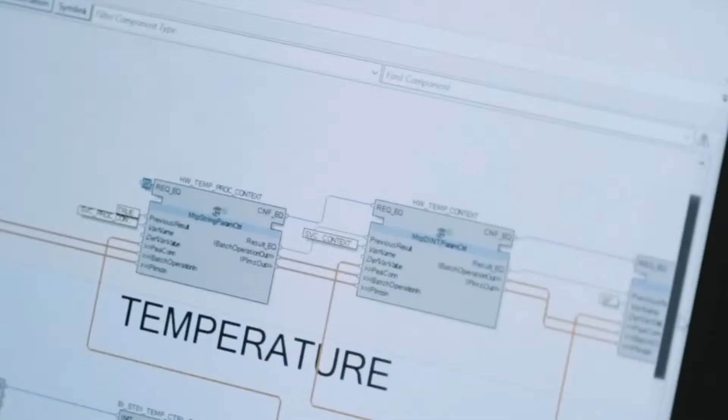universalautomation.org is about sharing a technology, a shared runtime execution engine. We call it a game changer in automation because we have first one technology which is based on IEC 61499, the standard which aims at decoupling hardware and software.

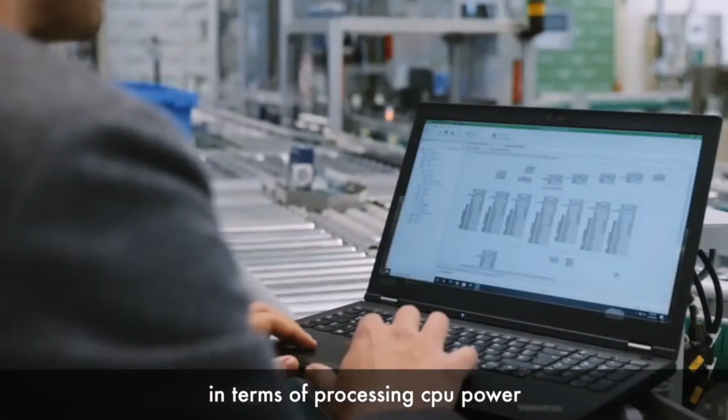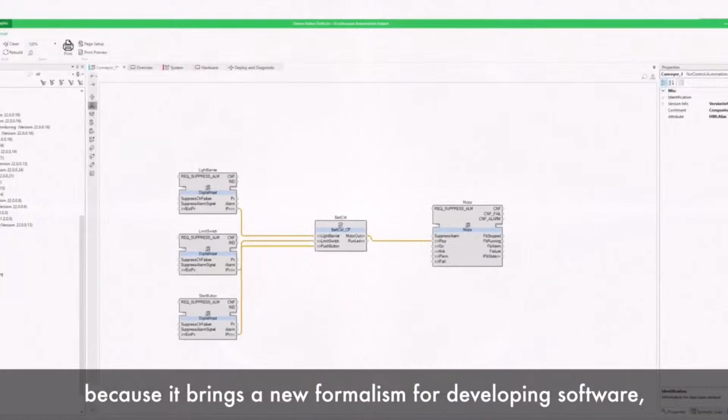Hardware itself is becoming very performant in terms of processing and CPU power, and the future is more about software. This approach is really a winning approach because it's very flexible. You develop the application once and can reuse it in each different configuration. That's exactly what Universal Automation and 61499 enable, because it brings a new formalism for developing software, which is object-oriented in nature, and allows deployment over distributed hardware for the final control system.

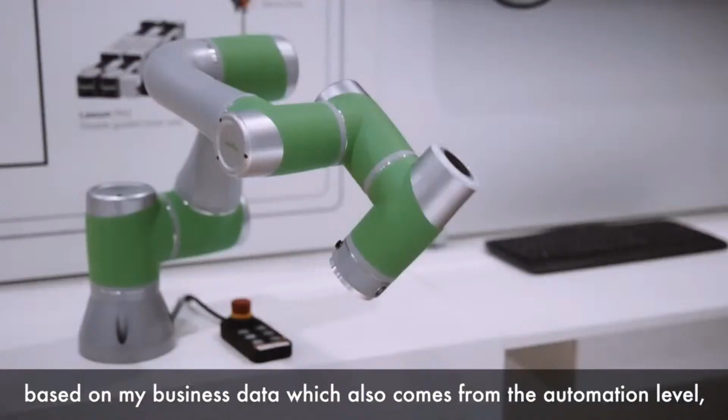So let's say it's a marriage made in heaven. If I want to make more conscious decisions based on my business data, which also comes from the automation level, I need universal automation to get this data efficiently and with the right engineering effort on the level where I can run the analytics.

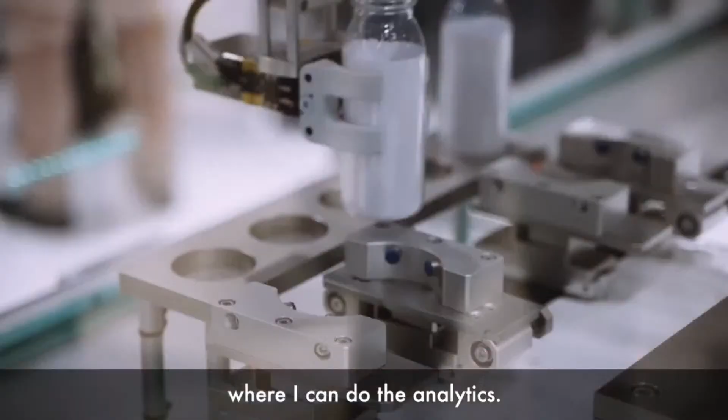Offers are available, not just from Schneider Electric with EcoStruxure Automation Expert, but also from Advantech, from Stahl, from ESA in Italy, and from other companies.

Advantech is growing really, really fast, and I believe if you want to keep growing in the future, you need to be able to innovate. When I see the universal automation approach, it is exactly the way of innovation we need to go with.

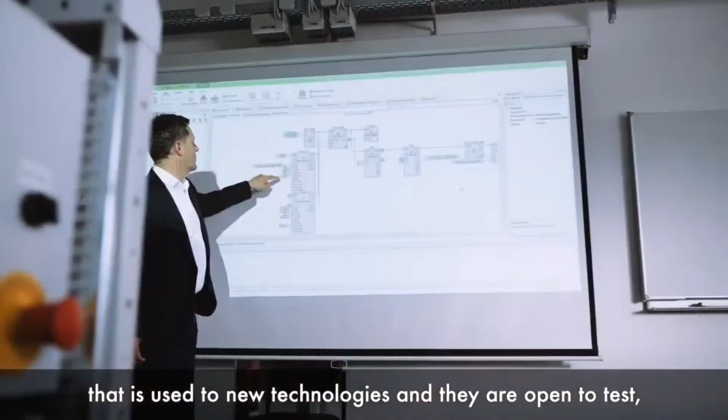Most of our customers from process automation are pretty conservative, so never change a running system. But now we see a new generation coming up, who are used to new technologies, and they are open to test and try these new functionalities. I think most of them understand the advantages of this pretty well.

I've been doing this now for 20 years, and I think over the years this is the most exciting change. From my experience, I see that in IT there has been a big revolution, and I expect the same in automation. I don't know when it will happen, probably takes a little bit of time, but probably a revolution will come.

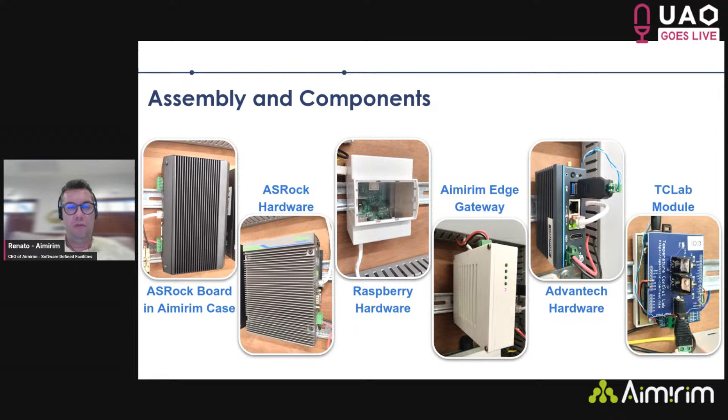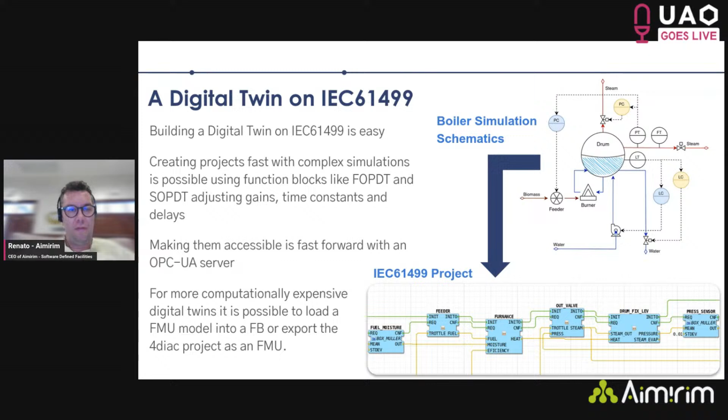So you have a basic digital twin that we built inside this test bed that emulates a virtual industry, a virtual facility, because we don't have a facility ourselves. We're a startup, so we have to build these kinds of digital twins to create our models and our software.

Thank you for this time. Now Pedro will show a real-time application of the plugin.

Hello everyone. Before we dive into the plugin usage, I'd like to show you a little bit about the environment we've built for this demonstration.

In our test bed, we assembled a system with 4 DCNs. Everyone is running UAO runtime.

The first DCN has this blue project, a Raspberry Pi running a virtual plant, that digital twin we just showed you about. Next to it, we have an ASRock board running UAO runtime as well. This DCN runs the yellow project, an advanced process control project, connected to the virtual plant, the digital twin of the boiler, with OPC UA.

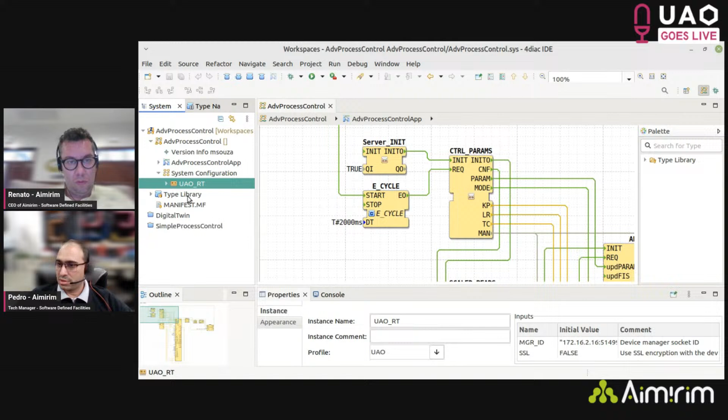I just click on UAO runtime here, go here, and I will kill the device, which will clean up everything running on there. It doesn't show any errors on the screen, so that cleanup was successful.

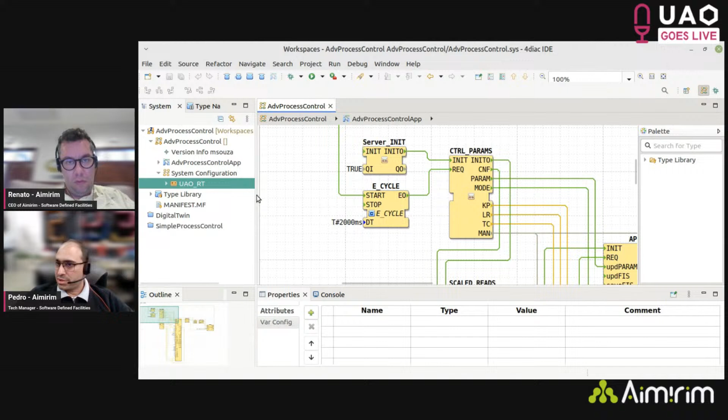Let me just close this project so I don't get confused. Now, to create a new project, you right-click on this tree here, go New, then enter a project name, I will call it set point change example.

It's provisioning it. There it is.

Now, first, we go to the system configuration and let's drag here the UAO runtime function block. Okay, this will connect things.

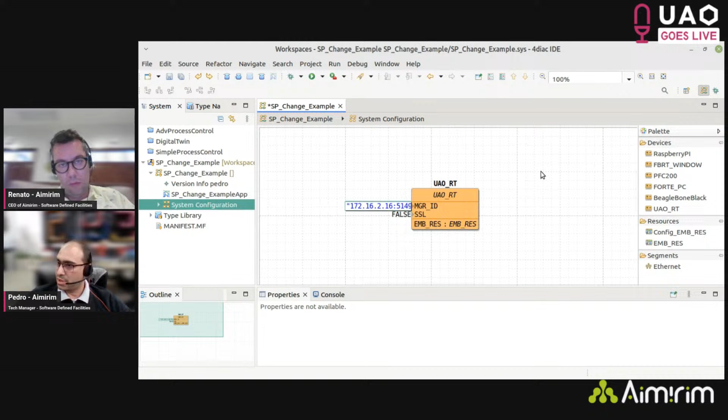So my DCN is running on this IP here, 216, and the UAO runtime is running on this port. You can see below on the properties of this function block, the system, that you have the profile. So you need to change the profile here for the UAO. This is changing the communication with the runtime.

Okay, so you're going this, let's save it. Now let's go to the system view here, clean project. Now let's build a project here. Let's go for a cycle first. I want to have a 1 second cycle.

Then I'm about to, let's read that set point first. So I'm about to call this function block here.

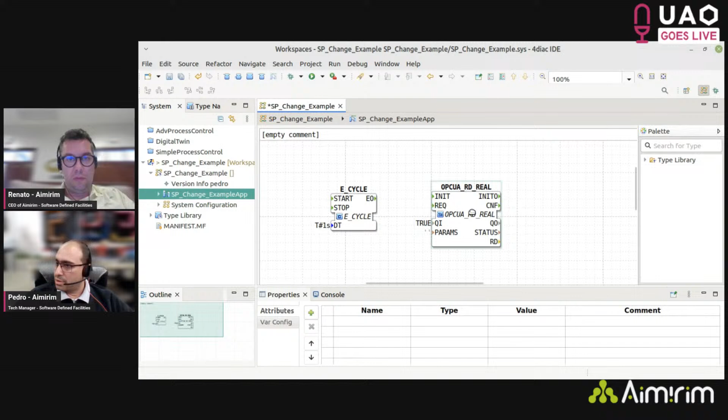Yep, let's read that value. I go to the parameters here. Let me edit this. So my connection string to read that is opc.tcp colon // the Advantech hardware IP address,

right? So it's 172.16.2.4, and the OPC UA server port that is running there is 4840. Okay, so let's go here.

That's a separator. Now, the variable I wish to read is on namespace one, and it is a string identification for it. It's called PID dot setpoint.

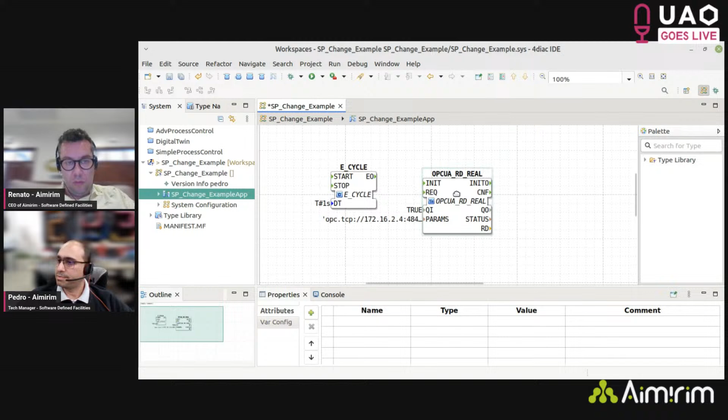Yep, that's it. Okay, now let's duplicate this function block here. And I want to, let me rename it first so I don't get confused, read.

Now I wish to write on the same variable. And I will change this function block here. Let's change type to the one that writes a real value.

Okay, let's start this one with 45, for example. Oh, it's a float, 45.0.

Okay, let's connect things now. I will initialize everything, and after the successful initialization, I want to trigger a cycle. Then this cycle, I want to trigger the read function block. I don't want to request a write just yet.

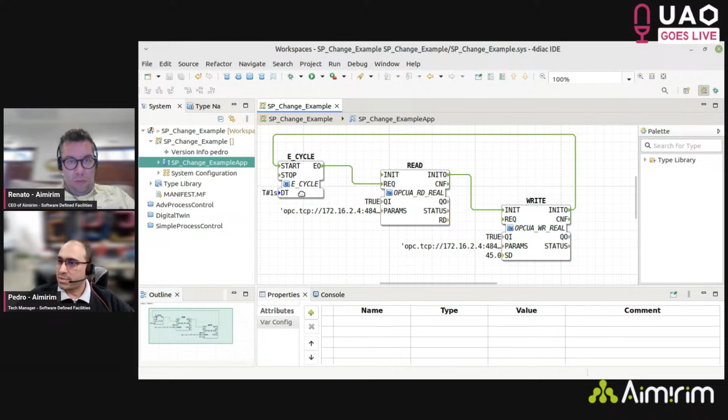Okay, so let's go. I'll select everyone, map them. Now they're mapped to the UAO runtime. And let's go ahead and deploy. So, run as deploy.

Okay, that was pretty fast deploy. Now let's watch this function block here. It would advise me to enable the monitoring. Yes, please do that.

Okay, there it is. Let me watch the function block below. It is already deployed on 4diac and it's already deployed on UAO runtime. Let me trigger this initialization here. You see good, and you see 35 as the current set point.

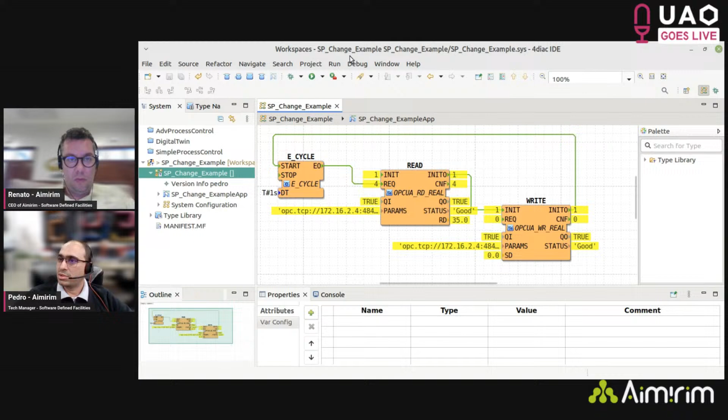Okay, to show a little better the view of this, let me just open the platform, so you guys can have a clean view about what I'm about to do. Okay, so we have a user prepared for this.

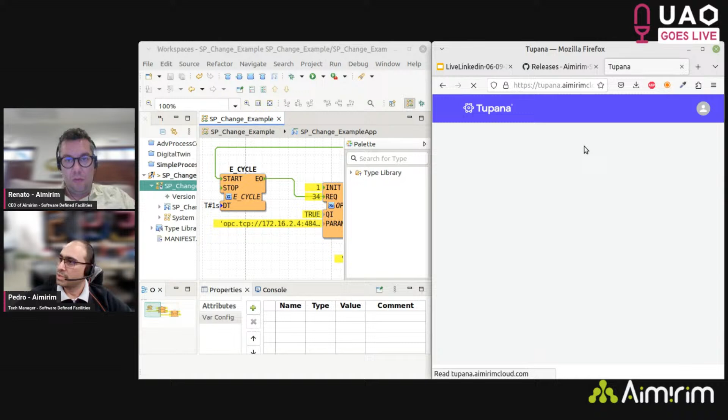Okay, now let's go here in my screen. Let's force some value here. Let's say 65.0. And let's request this right here.

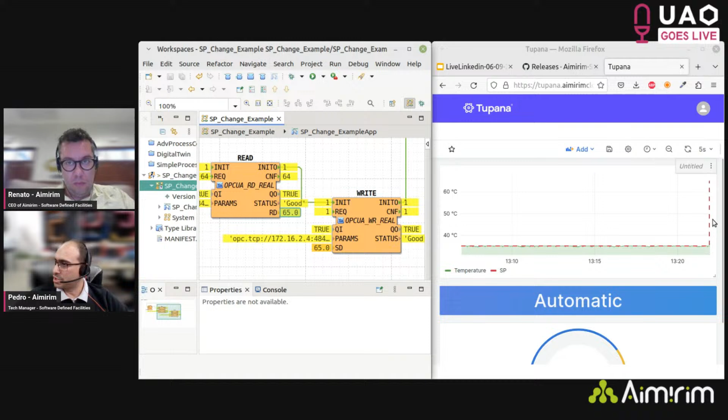Trigger it. Okay, you see here on the read block that it goes, and on the platform that is a cloud platform, you just saw the step on it. Here below, you just see the PID is working, so it jumps the control to 100% to heat everything up, and this temperature should start rising anytime soon.

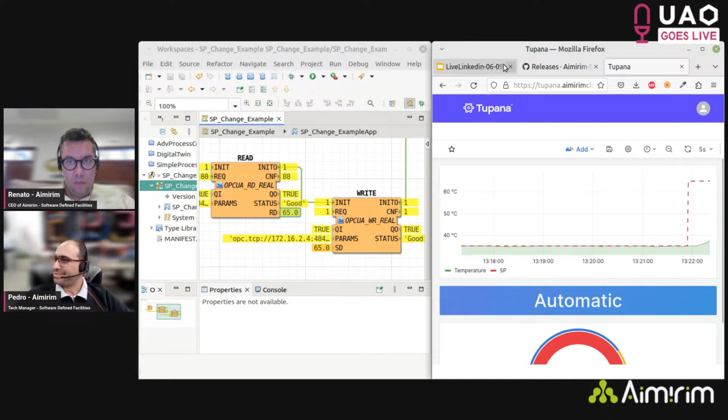Yeah, you see here. So I'm not gonna take you over this whole process of heating here because it might take some time, so just working. Hey, let's come back here.

Cool. Now that that small project works, we're gonna deploy back what it was there. So it was a full APC project. This APC project is controlling the virtual plant, the digital twin of that boiler, and we'll deploy it back here on the ASRock board, that yellow project, and we're gonna watch everything going on in here in the advanced process control. We can change things if you want to, if we have the time yet.

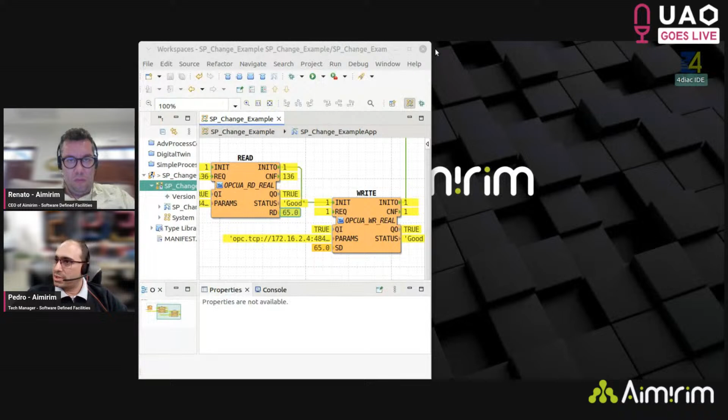So let's go and do this. First, let me disable the monitoring of our system here. Okay, then let's kill things to, let's kill that. Okay, there it is. No error on screen, so it works.

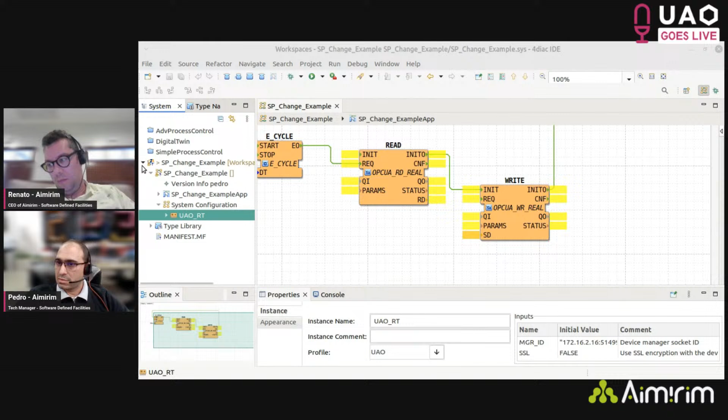I will close this project so I don't get confused again. Open it up, the advanced process control. So this project here was ready, right? It's what I already built. You have the read, you have the scales, thing for the controls, and you have the write back. Everything is already built here.

So I'm just going to go ahead and deploy this just like it is. Run deploy. This takes longer to deploy. Obviously, it has way more function blocks.

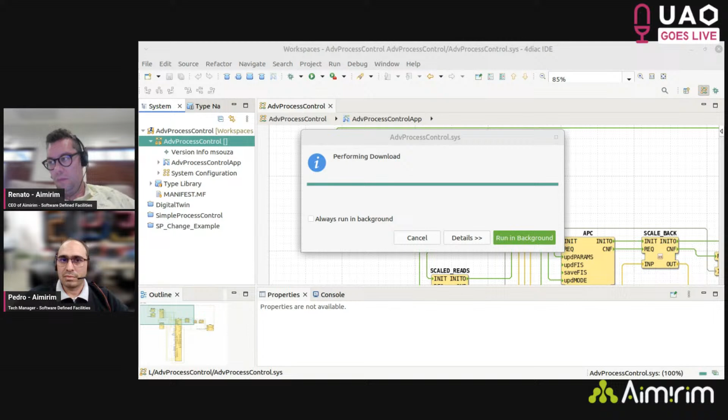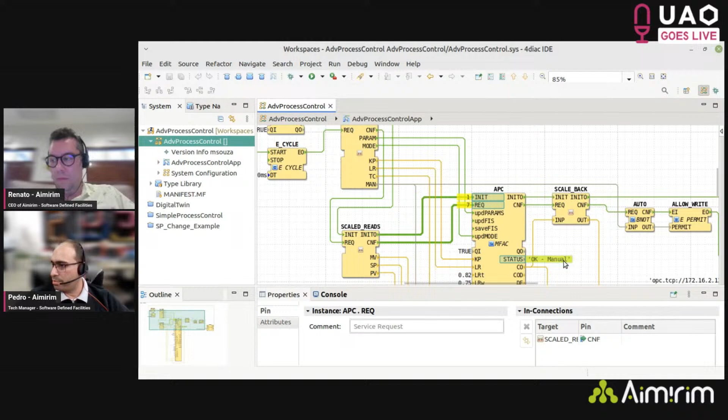Okay, there it is. Let's just watch it here, see if we are getting things running. Enable monitoring, please. Yep, the control is on manual mode and it's receiving requests. So right now it's just this. We can see it in the platform.

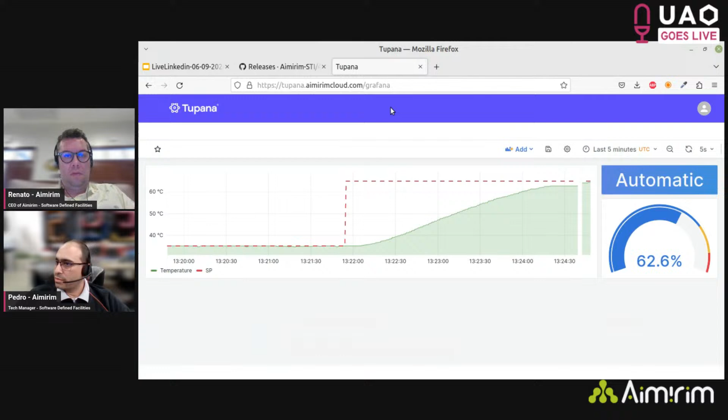Oh, you see the temperature got there. Let's go back here in dashboards and go to virtual process. Here you see, so this is currently on manual, right? And the pressure is here.

So that was it, that was things I was to show. I'll just set this control on automatic here, but it's pretty much that.